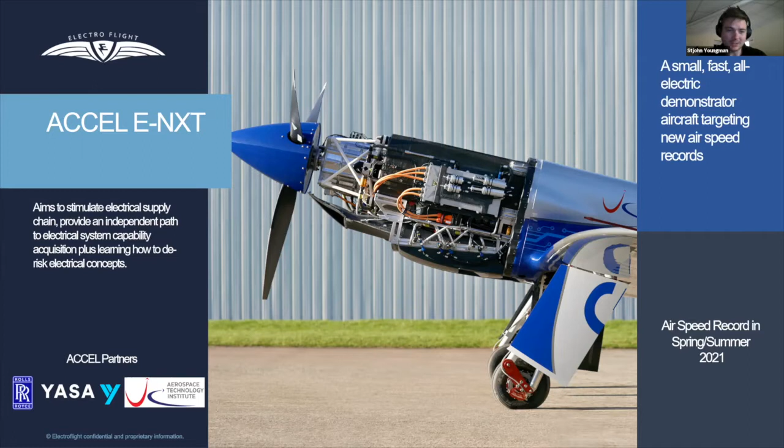In the bottom right, you'll see my outdated presentation of the airspeed record attempt in spring/summer 2021. It didn't come to fruition, as most of you guys know that have done anything with aviation and aeroplanes - it always takes longer than you think, and there's some complexities there. But we're well on the way now, and we're flying, and we'll talk about that in a minute.

Moving on to the propulsion system a bit more - here is the propulsion system out of the aircraft in this picture. It's fundamentally 3 YASA 750R motors all stacked together onto a single shaft. This is a standard, effectively a Lycoming propeller flange at the front, so we use an MT electrically adjusted propeller, and then everything from the back of it is slightly different. You have a single shaft that runs and connects all 3 of these motors up. That's quite an interesting concept.

Fundamentally each motor is driven by its own inverter, and has its own individual battery system. So we actually have triple redundancy through the whole powertrain up to the mechanical shaft that links the propulsion systems together. Although we've only got a single propeller, so we're not fully redundant, that's a very high integrity, high reliability part. In all of the experimental elements of the project - the battery, the motors and the inverter - we were actually redundant, which was quite an interesting concept. Although it doesn't help us go faster, it's an industry relevant concept to push through.

We've also followed that through into the cooling system, which is decoupled, so each motor, inverter and battery are cooled in a different way, so that we don't have any common cause or common mode failures there. One thing that's quite interesting about the aeroplane - it's a 400 kilowatt, roughly 530 horsepower aeroplane, and the entire propulsion system is cooled by these 2 relatively small NACA inlets here, compared to a standard set of Lycoming cheek inlets for cooling.

Admittedly, not enough to get anywhere near the fuel energy density, but it starts to make a difference. We've spoken about batteries a fair bit already, and the battery is fundamentally the heart of the aeroplane. It's the biggest, most complex element, and the biggest part of the program for us from a development point of view. This is where we spend a huge amount of time and effort.

You can't go and buy the battery system that we wanted off the shelf, so we wanted to develop that ourselves. Electroflight's core business now is around that battery system. That's where today there's the biggest opportunity in industry, and that's why we now design and build battery systems for a number of customers in the aerospace electrification market.

So you can see here in the picture, you've got what we call channels. Each channel, a line of battery, is actually made up of 6 individual battery modules, and each of those 6 equates to a 750-volt battery system. All 3, when the lid is on, are actually isolated from each other - there's no electrical, mechanical, or environmental interface between them. We do that to drive redundancy back into the system.

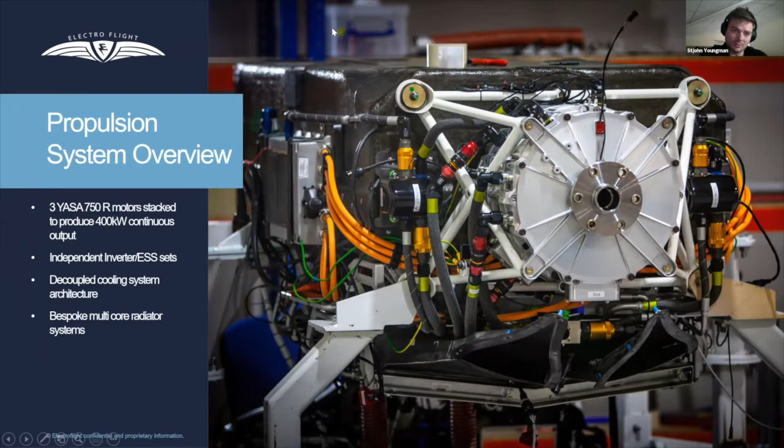Some other interesting features about this battery system design: the case that the battery sits in is a structural element. You'll see in a minute, if we go back, the propulsion system mounts onto the front here - we've got a very standard AV mounting system. The loads from this propulsion system go into the battery case, and they're resolved at the airframe a bit further back, which we'll have another look at later. We did that to try and get some better aircraft system efficiency.

Some other points to note: this is a 750 volt battery system, which is considered higher voltage. Traditionally, most electric cars are at about 400 volts. One of the ways they're going to push charge rates and make charging systems faster is by increasing the voltage. Porsche and a few other big car companies are pushing higher voltage systems now, and we did it for the same reason: it means we can charge the system faster.

If you go back to basic electronics, V equals IR. So if you can increase the voltage, you can reduce the current for a given power, and that's effectively what we have to achieve. Otherwise, you end up having so much current going through your metallic conductors that you produce a lot of waste heat, which is really bad. So if you can push the voltage as high as possible, that's really advantageous.

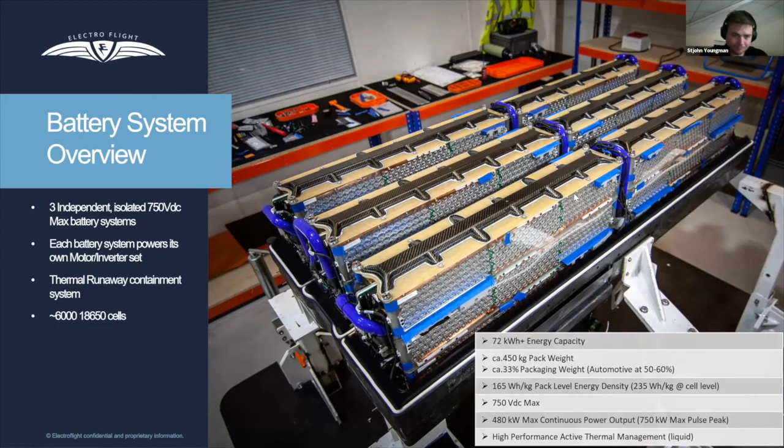Here's another view of what that battery system looks like. The packaging is super integrated. We've got a really great design team, really experienced design guys, a lot of them from automotive and motorsport, so it's all about the detail of the design. It's very compact, and you get that beautiful elegance that you see with some engineering. We're really proud to show what's underneath the battery here.

What's also interesting is it's a liquid cooled battery. So we've got 750 volts, and we're flowing highly conductive fluid through it, which is a bit counterintuitive from a safety perspective, but you really must do that to get the heat out of the battery. Otherwise, you'll overheat the cell before you've got all the energy out, and that's really important in any high power application. The thermal management of the battery is really quite critical.

Now, when we build the aircraft and put the two together, we actually push the aeroplane onto the battery, because the battery and its propulsion system is about 700 kilograms, and the airframe itself, a beautiful, lightweight, fully carbon fiber airframe, is only about 300 kilograms. So it makes much more sense to just push the aeroplane onto the powertrain.

The powertrain itself, sat here on the build frame, can actually operate entirely separately from the airplane. We could power it up and spin the shaft with it all sat here. We did that because we wanted to keep the airplane as simple as possible.

You can see here on the right, this is the composite structural battery case that we mentioned, a really key element of the design. Obviously, as you can imagine, there's a lot of design analysis that goes into the background here, and that's why these programs take three years to design, build, test, and validate.

Obviously, we were building an aircraft for Rolls-Royce. Rolls-Royce are a major FTSE 100 company, they have huge reputational damage potential, and that's why even for a demo aircraft program like this, the level of engineering we went to is extremely high. That's what people forget often when you compare to a pure startup company building an aircraft, in that you can take a different level of risk.

Thermal runaways are a big topic of the day, specifically in aerospace, where you're effectively in the air with your battery system. If you have any kind of thermal event, your ability to get the aircraft on the ground and get out isn't the same as it is in automotive.

So our approach to this is quite different. In automotive, the safety case is well known now. Yes, there are some issues with thermal runaways — if you put Tesla fire into Google, there are lots of examples in early days of fires, and fundamentally, if you build enough vehicles, they will happen. But in all of these cases, the passengers are able to get out pretty much every time. Aerospace is slightly different; we have to design to contain the fire for as long as possible.

We've got a rigorous design methodology to try and reduce the probability of cell fires by controlling and not abusing the battery. That thermal management is really important. You've got to look after the cell as best you can, and in aerospace you build in lots of mitigation, then pretend none of it works, and still go to the next level of engineering to stop the next problem. That's the challenge of aerospace this century: safety levels today need to be as good as the outgoing technology, whereas back in the pioneering piston and jet age, safety levels were shocking compared to today.

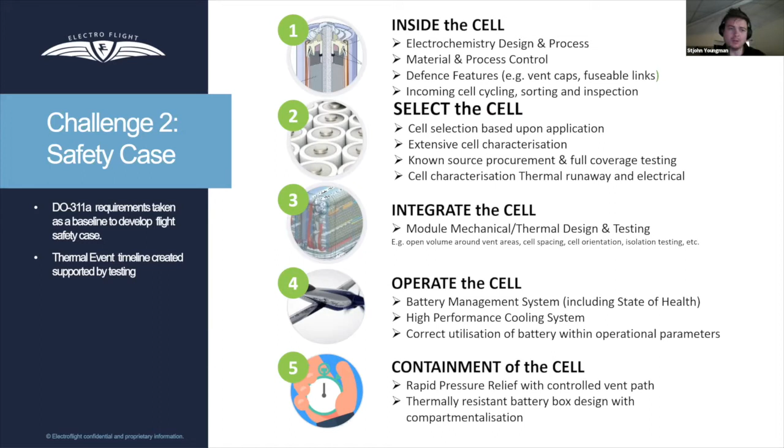So these are the challenges we have. We've got to solve all of these fundamental safety problems before we go to market, not develop them over time. That's an interesting factor we have to deal with.

The picture bottom left is actually a single cell going into thermal runaway. It's pretty ferocious under certain conditions, and that's the challenge. Remember, 6,480 of those cells are inside our battery case, so there's a lot of flammability. And it's not just flammability, it's almost like fireworks. There's a force behind that reaction.

On this program we designed some sub-module testing so we could build a representative case and see how well our protection systems work at containing a cell fire. We forced a cell into thermal runaway, and we're pleased we met our objectives. We basically have a 10-minute containment strategy: a cell can go into thermal runaway and we know we have 10 minutes to get the aeroplane back on the ground. Even then, we managed to demonstrate we think we might be able to contain it indefinitely, which is good because you might be able to save the aircraft at least. A lot of design effort goes into this stuff.

You can see at the top right the charred remains of one of the smaller modules. But not all of the cells in this went off—we managed to stop the fire from propagating all the way, which is a really big win for the design. Maybe 20 cells went off in this event.

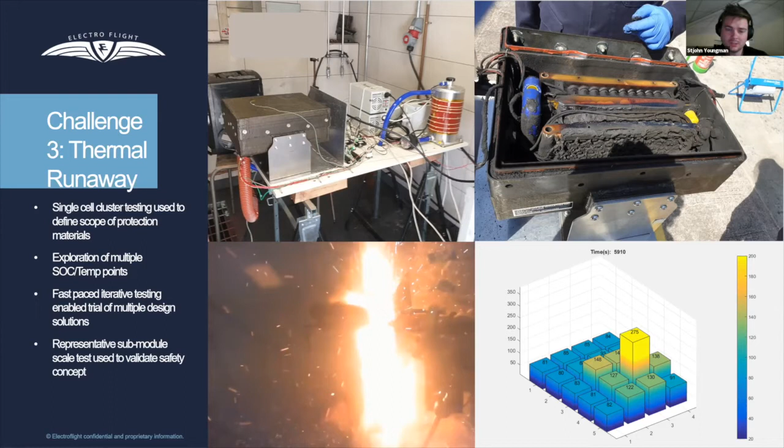So, we've mentioned cooling. One thing we all love about existing air-cooled aircraft engines is the simplicity of the cooling—it's effectively passive, with no failure modes other than maybe blocking an intake. That's really good because simplicity is just lightness, and that's how the aircraft we have today, aerobatic aircraft of great performance, are effectively very low on system complexity. The challenge going forward into electrification is that as you push power up, the system becomes a bit more complex to deal with.

The cooling system within the battery is one of those examples, and that cooling system has to reject heat into an external radiator of some sort, which we'll show you in a bit.

The other thing we do is pre and post flight conditioning. To get the most out of the battery system, battery cells have internal resistance that varies with temperature. This is why on most modern electric cars they have preconditioning cycles, so when you get in the car it's preconditioned the cell to the perfect temperature for maximum range. It's also why in winter the lower cell temperature increases resistance, so you get less range. We combat that by pre-selecting the temperature we want the cell to be at, so we can keep it in its most efficient operating range for as long as possible.

We also do it because cells can be discharged up to quite high temperatures, all the way up to about 80 degrees C, which is pretty hot. But they can't be charged at that same high temperature—you can only regen at about 40 or 50 degrees C, which is why in electric vehicles the regen isn't always consistent. If you drive the vehicle very hard and heat the battery up, at a certain point it will stop letting you regen back into the battery.

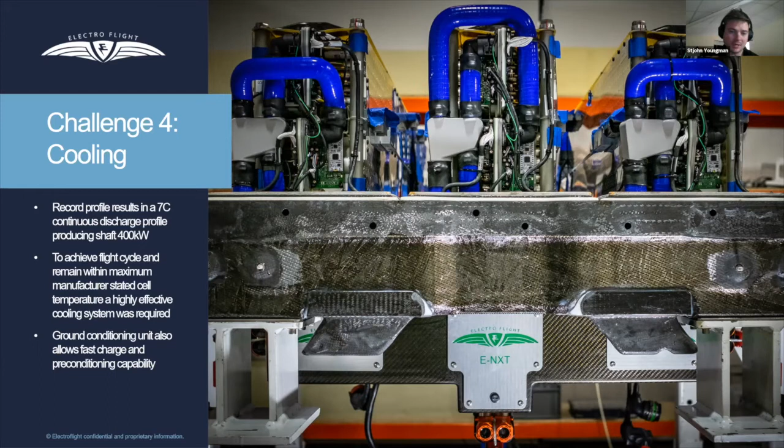That's obviously a bit of a challenge in this aerobatics context, where you're going to be getting the battery very hot. What that means for us and the E-NXT is when we've got the aircraft back on the ground, before we can charge it, we actually have to chill the battery, cool it down and then start putting charge into the system.

You can see this is the bottom of the battery. These are the cooling quick disconnections that we use to attach to the bottom of the aircraft, and we can condition it with almost like an AC unit, and bring the cell temperatures down. Again, fair bit more complexity, but it's what we have to do.

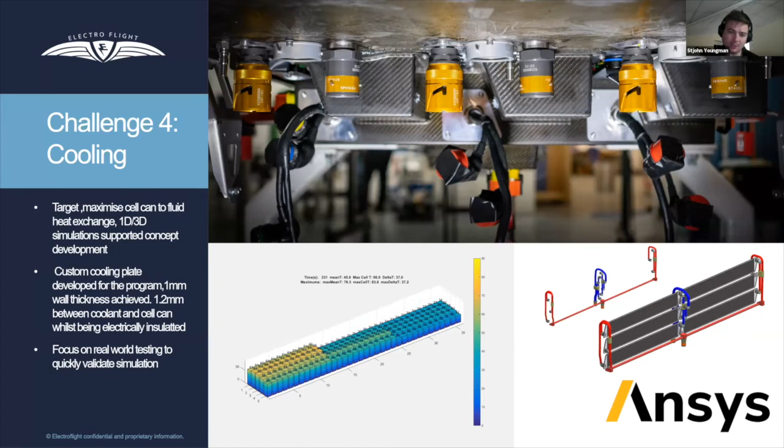Otherwise, if you didn't have that ability to cool the battery on the ground, we'd be limited to maybe one flight a day. At the moment, we can achieve between 2 and 3 flights a day because we've got this ability to control the battery's temperature so actively.

Again, we mentioned complexity. Unfortunately, batteries aren't entirely passive. We mentioned some of those safety elements there. So the battery management system - you can see this, I find this picture really good. It's another example of that beautiful engineering integration where you give them a free space and they'll somehow manage to completely fill it up with hardware and electronics. These are basically the battery management systems for each individual battery system.

One thing to note is that the battery is fundamentally always on. There's no way of actually turning a cell off. They are always on, which gives you some challenge, because what this BMS has to do is provide the protection system and the contactors - effectively the high current switch - to ensure that the battery becomes on and off at the right times.

One of the other elements, just fundamental safety - there are not that many ways of killing yourself with an internal combustion engine vehicle immediately, even if you're really adamant that you want to when it's stationary. Unfortunately, electric vehicles are quite the opposite. So you have instantaneously lethal voltages within that system, and that's why if you ever have the chance to look at the bottom of an electric car, they're very hard to get into to work at.

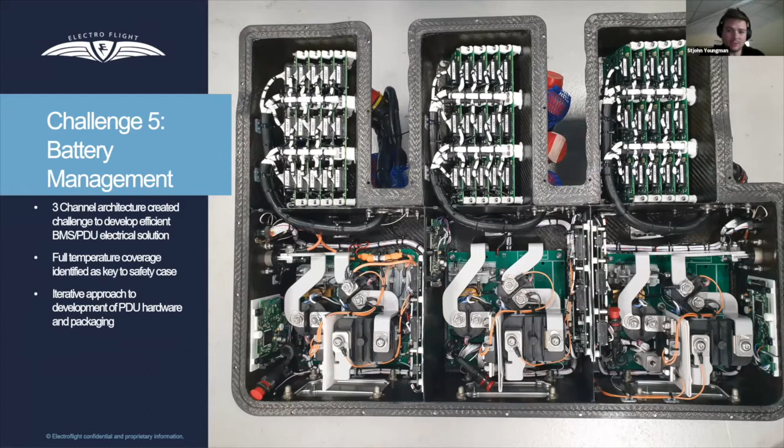So testing - in terms of building a powertrain and getting it integrated and flying it is one thing, but you've got to create a safety case to demonstrate why that aeroplane is safe to go into the air. And that actually is a lot of work that goes into iterative testing to demonstrate that - we did thermal shock testing.

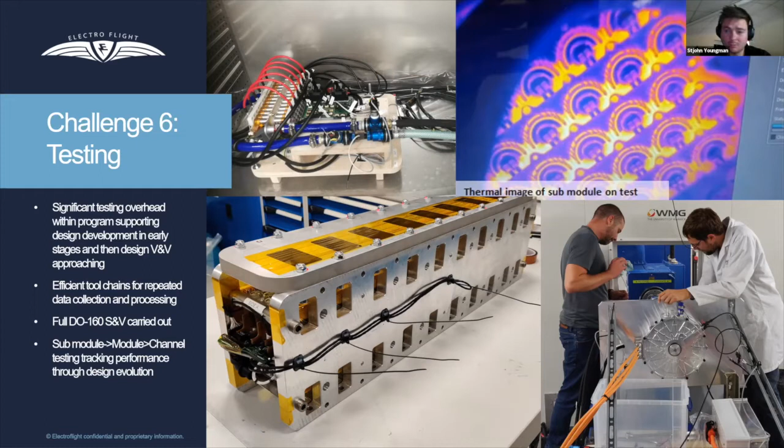The other challenge is manufacturing. These systems are quite complex to build. Putting 6,000 plus cells together requires a lot of repeatability. You need every single battery module to be the same. So even though we're only building enough batteries for one aircraft, you still have a manufacturing challenge in terms of getting repeatability there - that's something to factor in.

It's very hard to go and build your own battery, even if you have the cells available to you. It's very time consuming, it's very laborious. And if you don't have consistency, you will not get good pack performance.

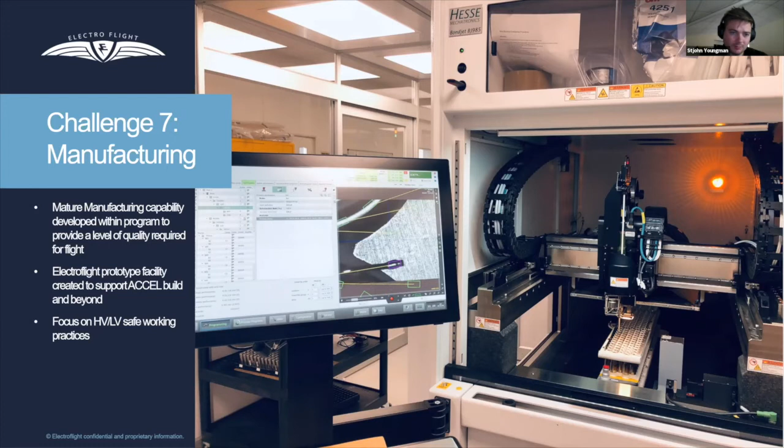We've done lots of scenario planning about all sorts of different failures, and to date it's been a bit like people's experience driving electric cars - it all becomes quite simple, which is great. That's a good testament to the technology, and in terms of pilot feedback, it's a really simple powertrain to operate - a single lever operation.

They've been surprised at the lack of feedback - surprised at how much noise and vibration normally tells you what power setting you're at. Phil noted it almost feels like flying an exceptionally high performance glider, which is really interesting. At the moment we're opening up the envelope slowly, building G, building speed, getting up to the point where we're ready to start breaking some records. That's really exciting.

From the perspective of aerobatics - myself being an aerobatic pilot and building my own aircraft - I don't think there's anybody more motivated to try and make electrification of aerobatics happen. So the remaining time is going to be my thoughts, taking advantage of having really good exposure to the industry, going through where I think we're at and when I think it might happen.

On the screen are some examples of pioneers in this area - guys that have actually gone and done some stuff, which I think is absolutely fantastic. Top left, we've got Extra, who did the 330LE with Siemens. Interesting aeroplane, very large battery, potentially not as much thoroughness in design as we've just demonstrated, but this was quite a few years ago now - it was a good effort.

The aircraft was quite heavy from what I understand, and I think it was in the utility category, so they had a pretty low G limit, which limited what they could do with it from an aerobatics point of view. I don't think it's flying at the moment, but they obviously learned a lot from doing it.

The Siemens Twister is really interesting, and demonstrates quite nicely some of the challenges. The Twister is a great platform - Andy McKee has single-handedly pushed its popularity for aerobatics - it's a very efficient aeroplane from an airframe perspective, meaning it can do a lot with a low power level. When you talk about the challenges with battery systems, being around 100 kilowatts or less is really beneficial, because it means you can push your battery towards energy.

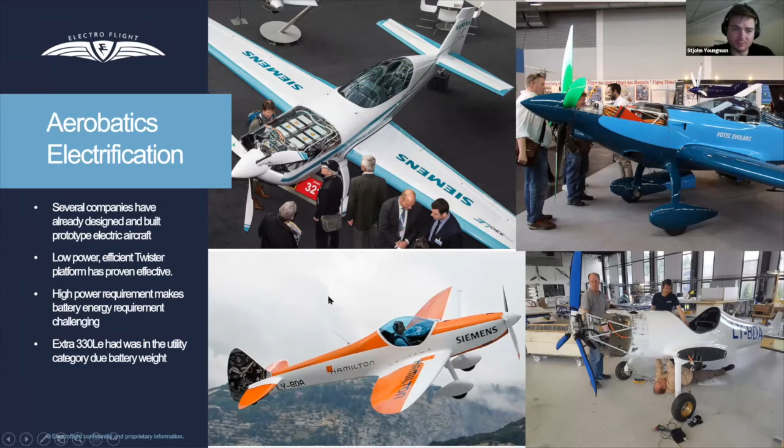What else have I mentioned? Yeah, so the efficiency of the Twister is actually really, really quite important. So in terms of, what are the blockers? Let's be realistic about it.

Electrification of aerobatics - let's imagine we want to build something that can compete at the unlimited level. I think at the moment, based on the work we've done, it's possible, but you're going to end up with an aircraft with almost no ferry flying capability. So you're going to end up with an extremely range-limited aircraft with a single point of use - effectively designed to do that aerobatic profile with a little bit of reserve.

Most of what we've done on the ACCEL program is what you'd call high value engineering. It's quite expensive, but I think we're still a very cost-effective program. You can look it up, it's publicly available - we spent about £6.8 million over just over 3 years. And remember, that's everything - all of the time, the people, the hardware. So that's fundamentally cost effective, only a bit more than what a single Rolls-Royce gas turbine costs. From an R&D perspective, what we've achieved is good.

But I think we can all agree that development budget is beyond most players in the GA market today, especially at the light sport end. So that's a bit of a challenge. The low maturity of the technology - how close it is to feasibility - means you've got to spend money to get the performance to where it needs to be. And unfortunately the low volumes don't help, so you can't amortize your costs over 100 airframes. I think it'd be pretty ambitious to work around that - we've got to recognize we're a niche sport with a niche application. So that commercial model is going to be challenging.

We think we will end up with around 40 kilowatt hours of usable battery energy, which is enough to do takeoff, climb, sequence, and return. Some energy management is going to be required, potentially depending on the sequence, but that may add an interesting element to aerobatics in the future - it's now going to be about thinking about that energy usage, which I'm sure nobody does today. Effectively, you're always assured of having enough energy. So that's an interesting element that may be introduced in these early electric aerobatic aircraft - there's actually a talent and a skill in managing the energy, a bit like gliding. Aerobatics equals electric aerobatics, maybe.

So yeah, really interesting concepts, and we're looking for options to take this forward and develop it and build it. If the lottery numbers came up for me on Saturday, this is where most or some of that money is going - into getting Electroflight to develop this and go fly this. I think there's a great opportunity to build it as a demonstration platform to show - not that the challenges around the commercials are very difficult at the moment - but to show that the technology is there or thereabouts, and sort of wait for the future to come. So there's some interesting opportunities there.

I think the World Championship Air Race that Nick mentioned at the beginning - let's hope they have a good first year or two. They've definitely got electrification on their radar. We're in contact with them and keen to, at the right time, offer them a solution. Air racing is also a great use case for electrification, in that you can manage the energy problem - you've got a very known flight cycle, and you can get away with not needing to ferry the aeroplanes.

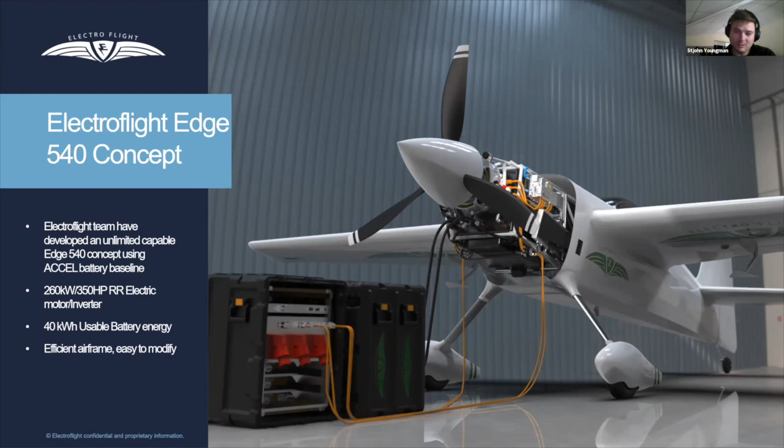That's the problem that we have. It's going to take a while to filter down. And there's also the element of, well, a Pitts hasn't always been as cheap as a Pitts is. A Pitts at one point was the absolute latest, greatest, hot ship, expensive machine, and it's only over time that it's kind of worked its way down, and I think we'll see a bit of that as we go. So yeah, sorry for not better news - I feel a bit bad, but yeah.

StJohn, Nick, given that the propellers that you're using look to be the sort of thing that's been developed for Lycomings and Continentals with their very old-fashioned slow rotation speeds, if you had a fresh sheet of paper, would you go for a completely different sort of propeller? Would that make an advantage?

So if anything, it's about - you can actually spin slower. It's all about spinning slower. You can turn a bigger prop at lower RPM more efficiently, and it's better for the motor. So direct drive motors are a bit more efficient at high torque, lower RPM. So actually on the NXT, we run the prop at 2,400 RPM max, which gives you some benefits, because when we're marching along at 300 plus miles an hour, our tip speeds are going to be reasonable. So we get a bit of extra prop efficiency there.

There's actually a bit of a challenge around - electrically actuated props are nowhere near as dynamic as oil governor driven props. So we were doing some formation flying with the NXT the other day, and as you know, formation flying is when you're the most dynamic on the throttle inputs, and it was the first time that the actual governing system couldn't keep up. So you've physically got an electric motor winding the pitch control unit, and we actually for the first time oversped - to 2,600 RPM, which we know isn't a problem because it's a standard MTV9 hub, so it's all good up to 3,000 RPM effectively.